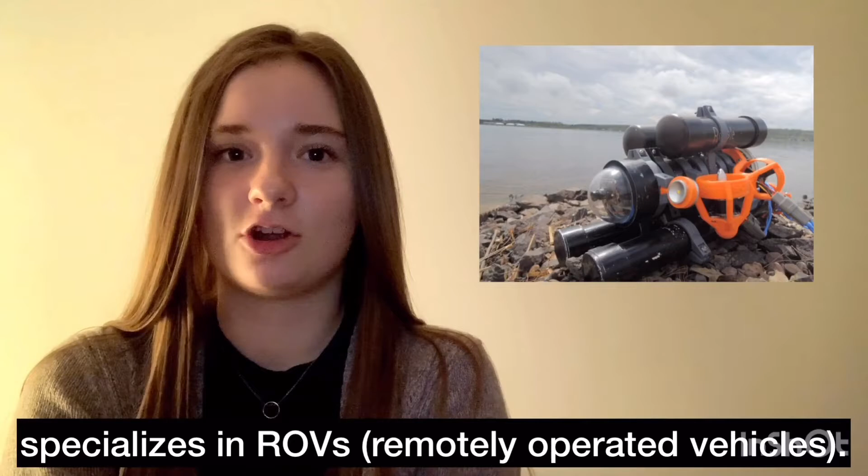SOAR is a student-led high school enterprise team that specializes in ROVs, remotely operated vehicles. Being student-led, we depend upon student leadership to collaborate on projects. Founded in 2010, SOAR allows students to acquire skills in areas such as coding, design, wiring, additive and subtractive manufacturing, and troubleshooting. SOAR is an elective in which students choose to enroll.

Each day, we challenge ourselves with student learning. There is often no correct answer, and failure, which happens often and in front of peers. In doing so, we rise to meet team goals and learn through our mistakes to benefit our local watershed.

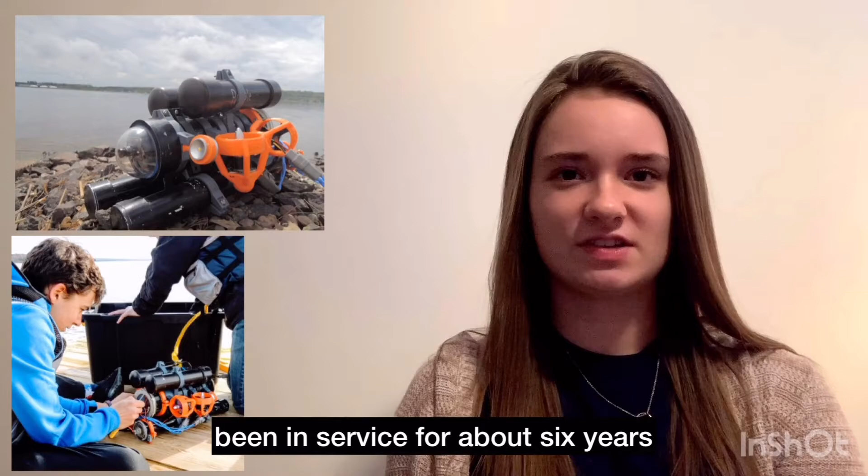Our two main ROVs have been in service for about 6 years now and are at the end of their service life. Over the past 6 years, we've fixed them when they were damaged, but it's come to the point now where they need to be replaced.

While discussing what changes we want to make to better improve the new ROVs, we wondered if instead of using PVC tubes to create the body of the ROV, we instead 3D printed the tubes. We figured if it was doable, it would be much more customizable to meet the needs of the ROV. This brought us to our question of, can we 3D print watertight objects?

We first searched online to see if anyone else had successfully 3D printed watertight objects. Watertight is different from waterproof, in which it can't allow water to enter or escape under many pounds of pressure. The only research we could find was someone that printed more of a waterproof object by increasing the extrusion multiplier in the 3D printer settings.

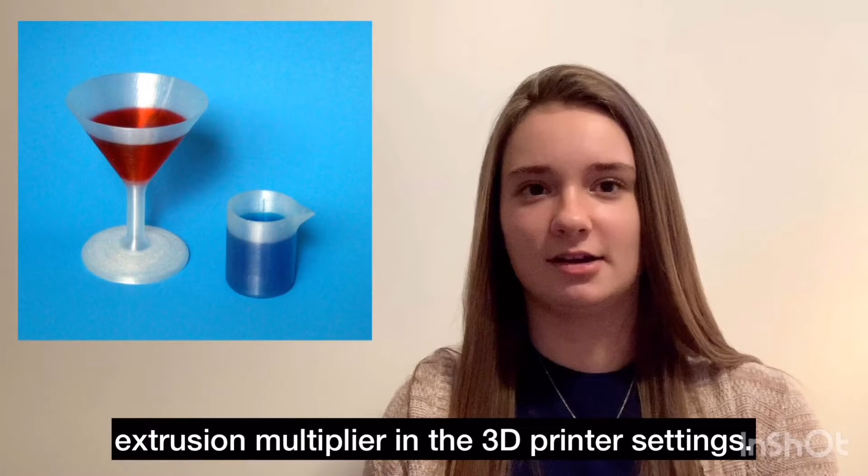This got us to wonder if there were any other printer settings we could experiment with to fit our needs of watertight instead of waterproof.

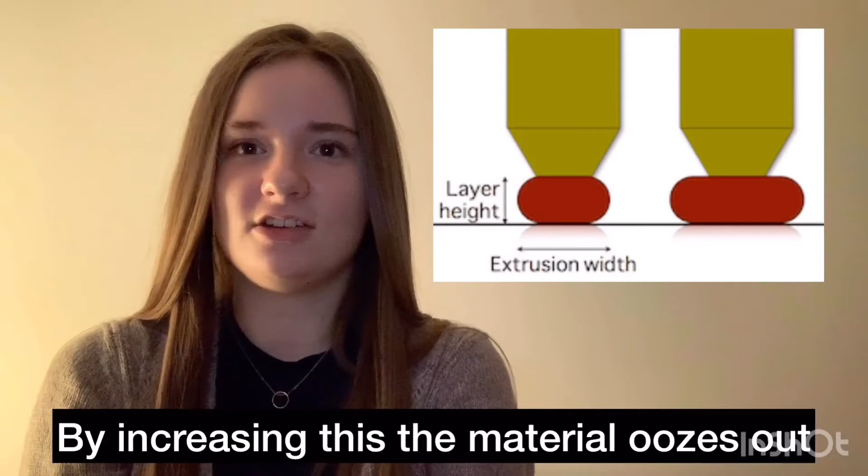So our first change was the extrusion multiplier. This is also known as the flow rate. It describes how much material is being forced out of the nozzle. By increasing this, the material oozes out and spreads out more, adhering it to the other layers more effectively and creating smaller gaps between the layers.

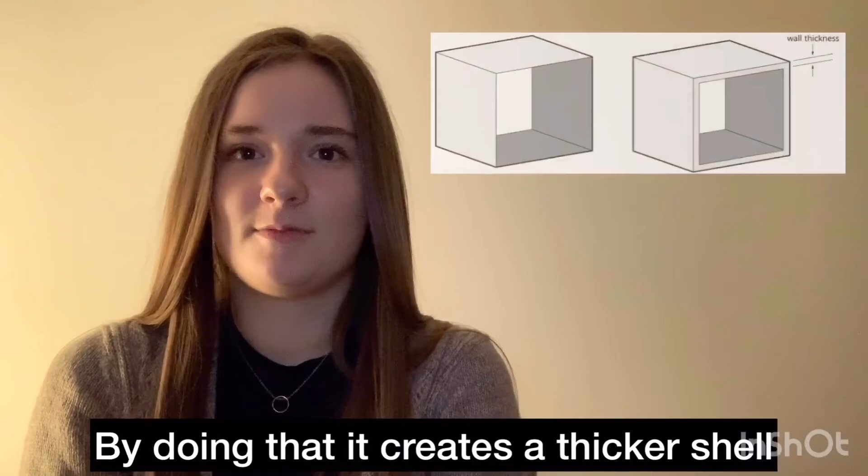We also increased our wall thickness. By doing that, it creates a thicker shell on the outside wall of the object. When printing, we used a 0.5 millimeter nozzle and told the software we are using a 0.45 millimeter nozzle. This would cause a slight overlay of horizontal layers of plastic.

We printed all of our objects in PETG filament. We chose PETG because it's strong and durable and pretty easy to work with compared to other filaments. PETG has a printing temperature range from 230 to 245 degrees Celsius.

We print most of our objects at 230 degrees Celsius, but we made a change and increased the temperature to 245 degrees Celsius in order to try and help the horizontal and vertical layers fuse together better to reduce the likelihood of water migrating between the layers.

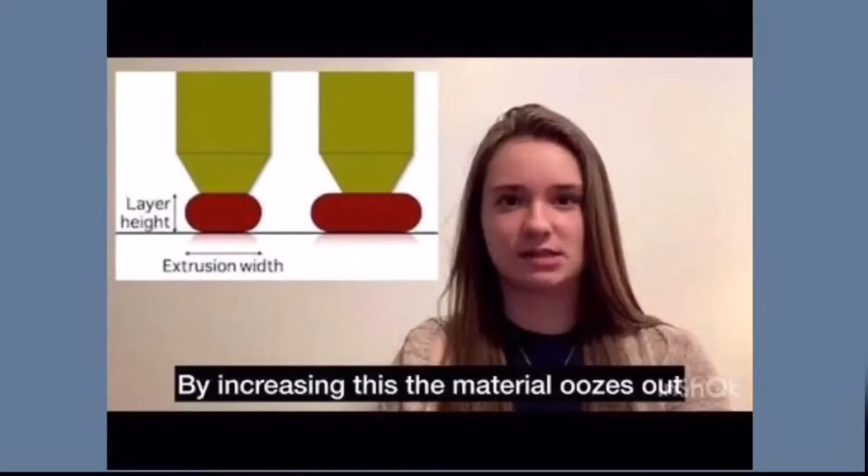Our first design was a cylinder that had a smooth, flat end on both sides. To secure the ends, we used 2 plexiglass plates with an O-ring groove. We secured them to each other with 5 bolts and nuts.

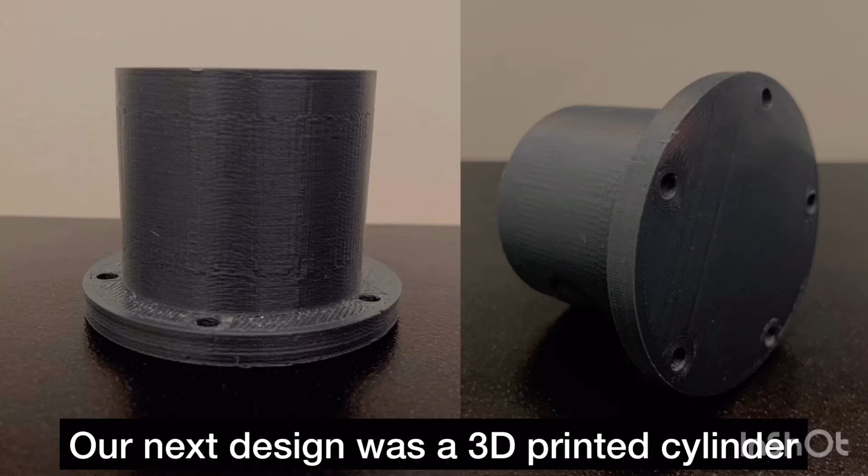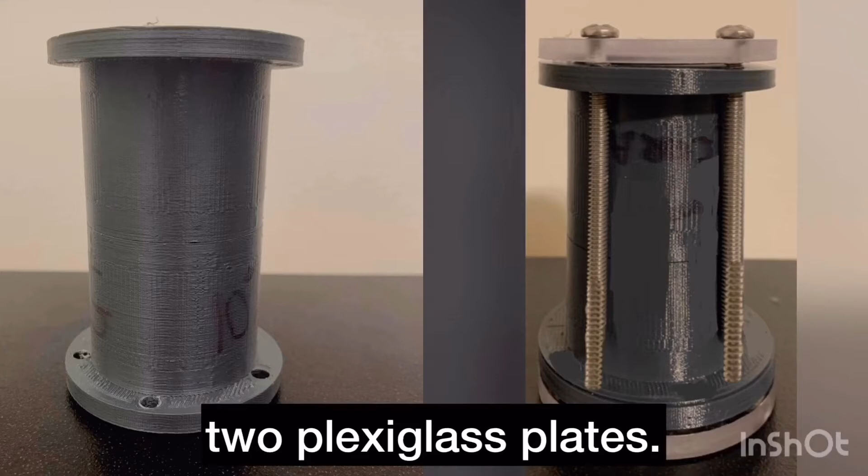Our next design was a 3D printed cylinder with the bottom fully 3D printed and the top side had a plexiglass plate which was secured with 5 bolts and nuts. We then tried a flange on both ends, closed with 2 plexiglass plates. This was also secured with 5 bolts and nuts.

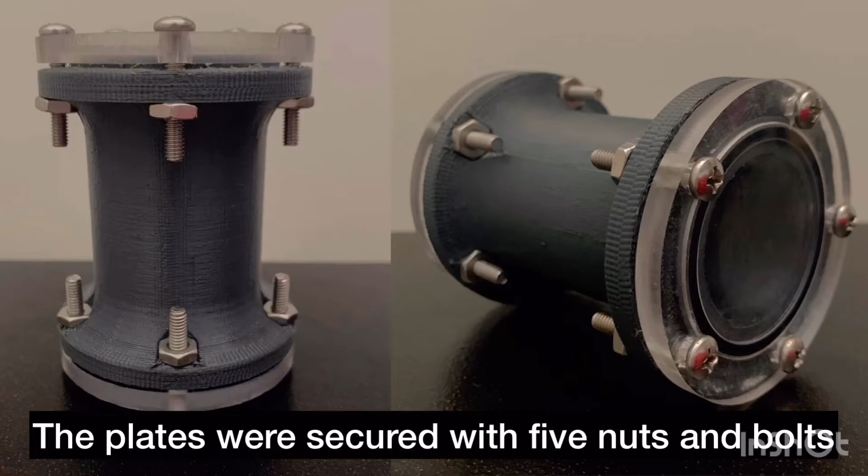Our final design was a flange that flared out with a plexiglass plate on each end. The plates were secured with 5 nuts and bolts separate from each other, so 10 nuts and bolts altogether, instead of running a bolt all the way across the tube. We also tested a PVC tube with a plexiglass plate on each end secured with 5 nuts and bolts as a control to confirm the O-ring design was watertight.

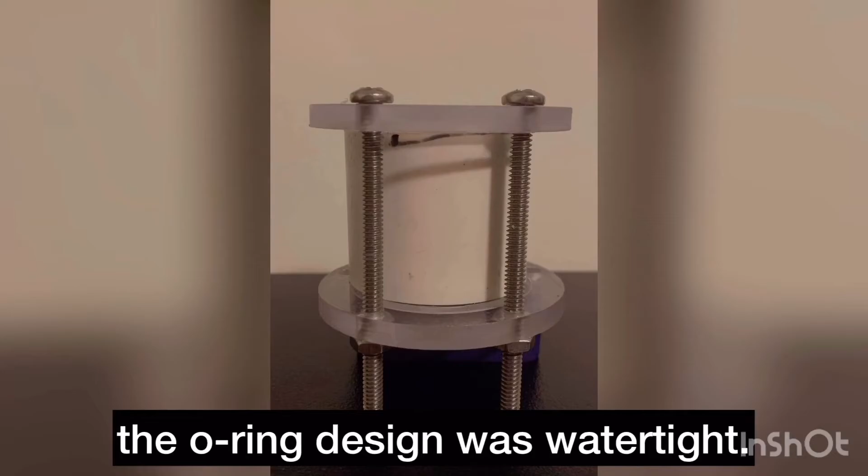Going into this project, we knew we had to put the objects under more pressure than they would get from just being submerged in a few feet of water. We already had a pressure tester, but it didn't work very well and it wasn't very practical for how many tests that we needed to run.

What was left of the old pressure tester was a big PVC tube with 1 PVC end cap with a pressure gauge and a brass barbed fitting. We ended up connecting the fitting to a water pump with clear tubing. The water pump was powered by a car battery.

The problem was we needed something to seal the other end of the tube that could come off so we could put objects into it. Normally when we want things to be watertight, we would use an O-ring. And when you use an O-ring, you need a back plate with an O-ring groove in it, and the O-ring groove has to be super exact, so we had to use the CNC mill.

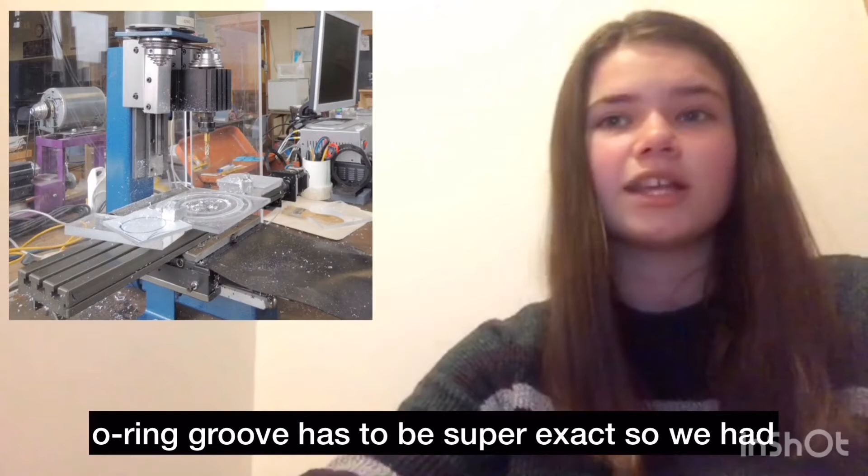We made G-codes for the O-ring groove, the bolt pattern, and the outside cut. The issue that came up was that our mill was too small to do the outside cut. That meant we had to use a method of indexing. So we made the G-code so it only did about 60% of the outside cut.

Then we made the bolt pattern drill all the way through the top plate of the plexiglass and into the bottom plate. We rotated the top plate 180 degrees and lined the holes up with the bottom plate. We also put drill bits into the holes to make sure it was exact as possible. Then we clamped it down, took the bits out, and milled the 60% outside cut again. That left us with the final plate ready to be used.

We designed a 3D printed ring that had the same bolt pattern as the plate. That was supposed to secure the plate onto the tube using 5 bolts and nuts. The problem was the clamp and the glue we used to keep the ring onto the PVC tube didn't hold.

We looked back at some ROVs and saw that they had glued an end cap on and then cut the end of it off. That left a little PVC ring that kept the 3D printed ring in place. After a while of testing, the PVC end cap broke and flew off in the middle of the test. We think it blew off due to the fact that it probably already had some hairline cracks from dropping the tester a few times.

So now we needed to seal the other end with something more effective than an end cap. We decided to make the same back plate that we already used on the other end. After making it, we drilled and tapped 3 tapered holes: 1 for the pressure gauge, 1 for the brass barbed fitting, and the last for a valve. We added the valve to make getting air out of the tube faster and easier.

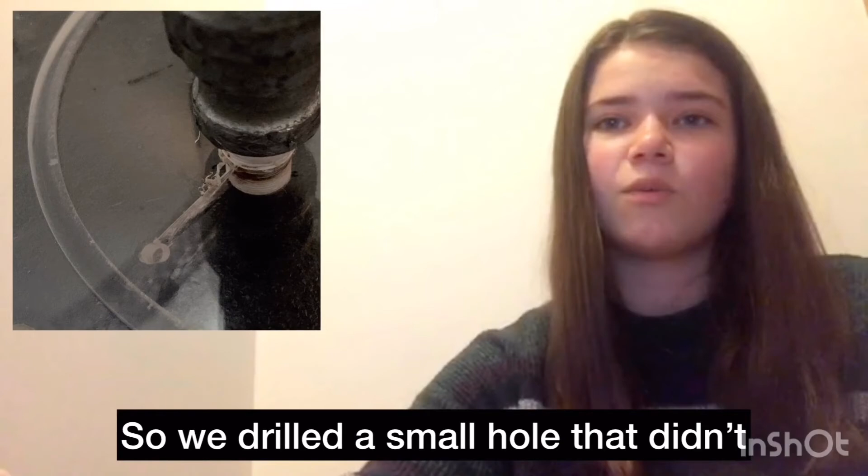When we were screwing in the pressure gauge, we screwed it so far that it created a small crack in the plexiglass. So we drilled a small hole that didn't pass all the way through at the end of the crack, and that distributed the pressure so it doesn't make the crack any bigger.

We attached the plate to the tube in the same way we did on the other side. We also attached a valve in between 2 clear tubes that went from the water pump to the tester. That made sure there was no back drainage that went into the water pump, because that would have caused damage.

Before we tested each tube, we'd write a different letter of the alphabet on it and record the mass of it. We wanted to see how much water got stuck inside the walls of the tube after the test. Then we'd pack the tube with a lot of paper towels in an effort to try to figure out where the leaks came from. We'd put the back plates on and tighten it with nuts and bolts and made sure that it was tightened evenly.

Then we'd test it, but before we made the pressure go up, we'd always make sure to get all of the air out, since we know air is more dangerous than water pressure. Then we'd let it go up to about 100 psi before stopping it.

Having clear backplates was a big advantage because we could look at the tube while it was getting tested. After the test, we tried to see where the water could have came in. After that, we'd record the mass of the tube again and compare.

All the tubes had an increase in mass. When we 3D print the tubes, there can be little gaps created between the layers. This can cause water to seep through the tube.

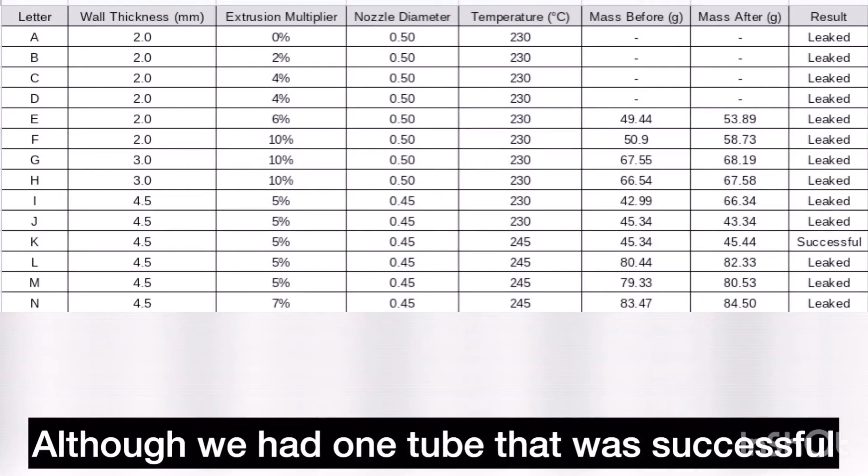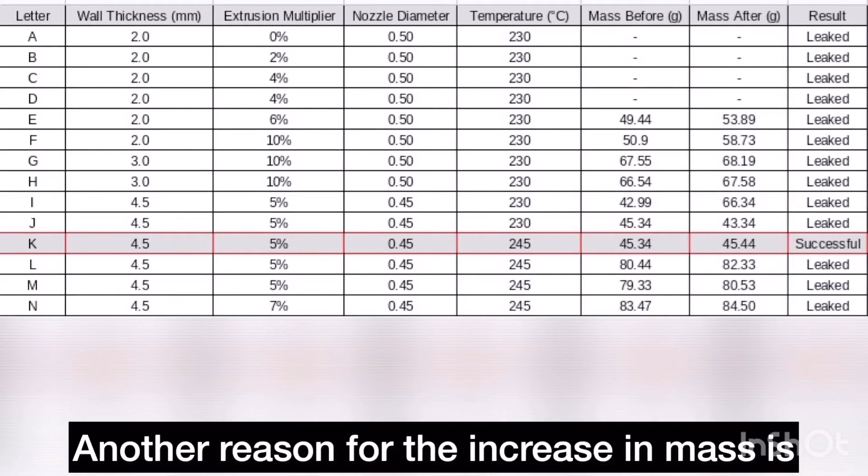Although we had one tube that was successful and did not leak, the mass still went up. This is because PETG filament is hydrophilic, which means it likes water, and this causes the PETG to bond with the water. Another reason for the increase in mass is because water is pushed into the small voids under such high pressure, but there is not the same pressure to push it back out.

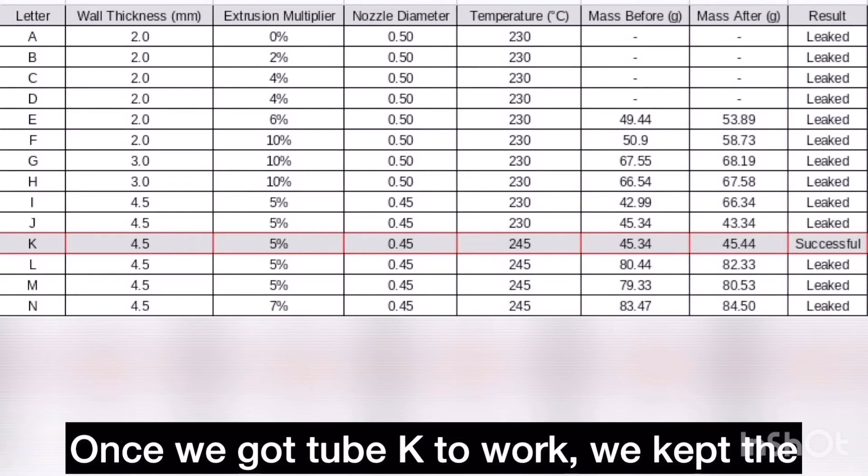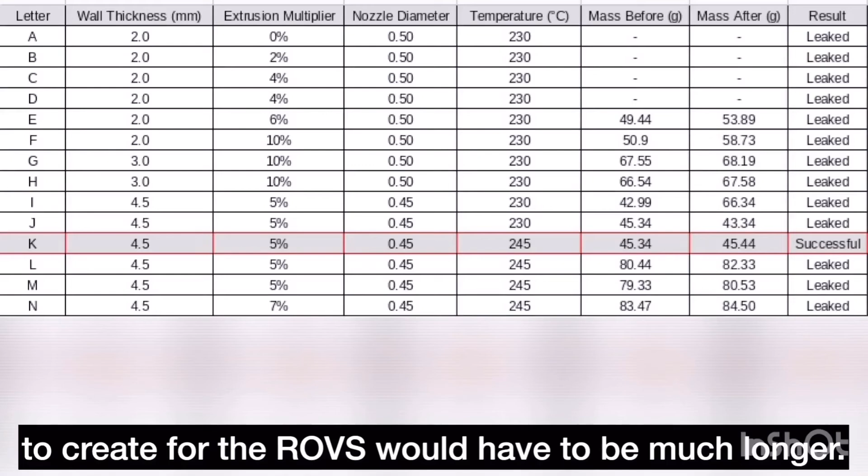Once we got tube K to work, we kept the printer settings the same, except we had to change the design of the tube, because we can no longer use a bolt to go across the length of the tube, since the tubes we need to create for the ROVs would have to be much longer. However, we haven't had a test that has been successful with the new design.

We've tested over half the alphabet in tubes, and we still don't have a good answer to our question. The only tube that didn't fail was the one with smooth and flat ends. The rest either failed because water got through the tube or the O-ring didn't work properly.

Basically, our conclusion is we need to do more testing. We haven't gotten enough results to really know the answer to our question.

Some recommendations for further testing are to keep changing the shape of the tubes. We still need to figure out if using the flare-out tubes or the flat tubes would be better. We also need to do more tests with the tube design that did work to make sure that it wasn't a fluke.

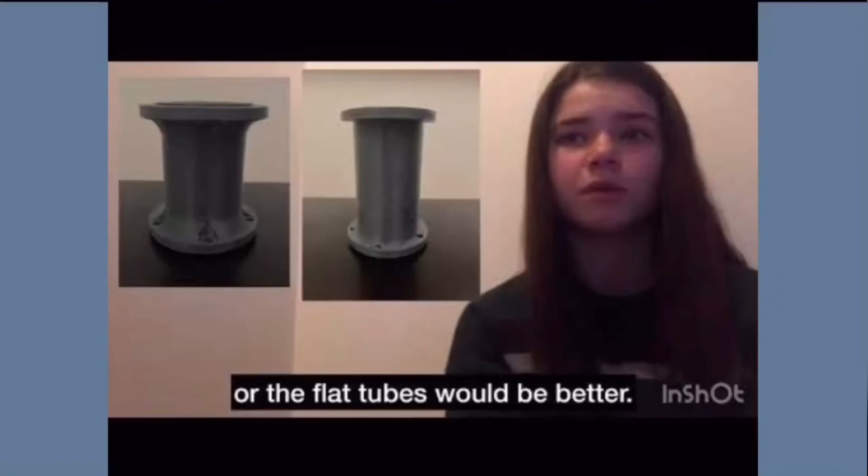We have a partnership with Isle Royale National Park, where we make ROVs for them to look on our boats to make sure that there are no invasive species. We also have a partnership with OcuGlass, where we make custom 3D printed parts for their assembly line. We are also trying to make ROVs that can explore flooded mines with the partnership of Keweenaw National Historical Park, along with Delaware Mine. Through all these projects, we benefit our local watershed by looking for invasive species, along with having an easier and better way for exploration.